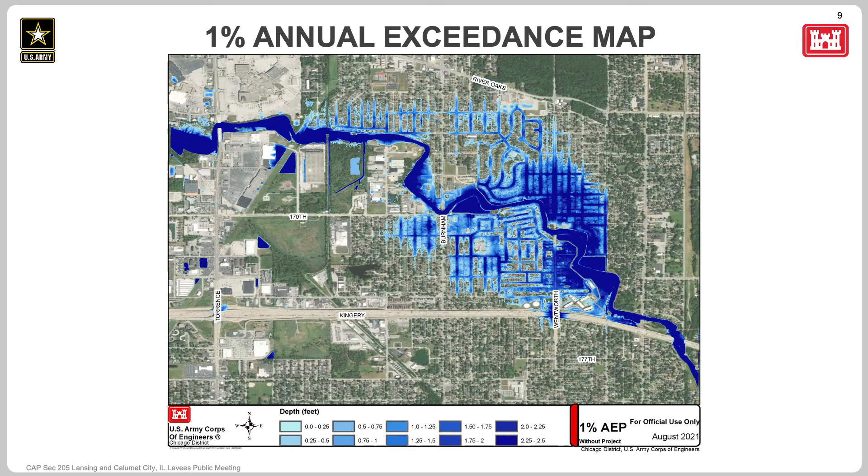To that end, the Village of Lansing and Calumet City really recognize the flood risk that's associated here with the Little Calumet River, and they contacted the U.S. Army Corps of Engineers to initiate the study that we're here to talk to you all about this evening.

The federal authority for this study is Section 205 of the Flood Control Act of 1948. This authority allows the Corps to work with local non-federal sponsors, such as the City of Calumet City and Village of Lansing, on local flood protection projects. Projects implemented under this authority are formulated for structural and non-structural measures to reduce flood risk in accordance with current policies and procedures which are specifically authorized by Congress for the Corps to complete.

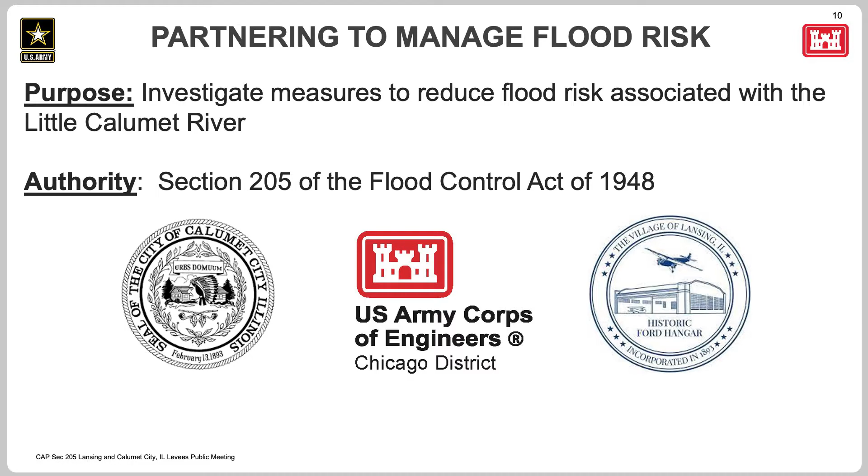Here you can see an overview of the project area. There is a levee system, which I'm sure you all are aware of, on the Calumet City side of the river, and then also on the southern side in Lansing. These two levees function together as a system.

The existing levees on this map are outlined in that lime green, and the existing flood walls, both the concrete and the metal sheet pile walls, are outlined in pink here on this map. The existing pump stations are the red circles. Lansing's system length in its entirety is about 1.25 miles, and Calumet City is longer, with two separate segments, totaling about 2 miles.

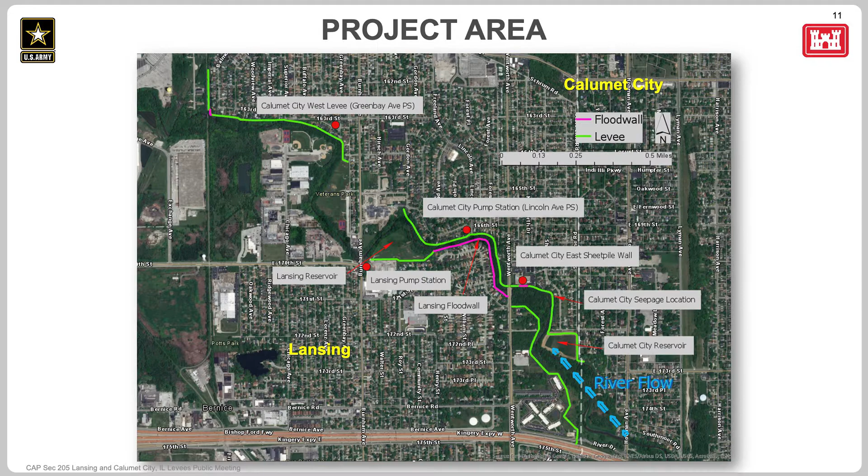Before we get into the details, we wanted just to cover the basics of a levee system, just to make sure we all understand the purpose of the project. On this diagram, you can see the basic features of the levee: the levee crest is the highest point of the levee, and the levee toe is the base of the levee, both called out in the images.

Essentially, the purpose of the levee is to keep the Little Calumet River floodwaters from breaching into the neighborhood and the yards and homes next to the river.

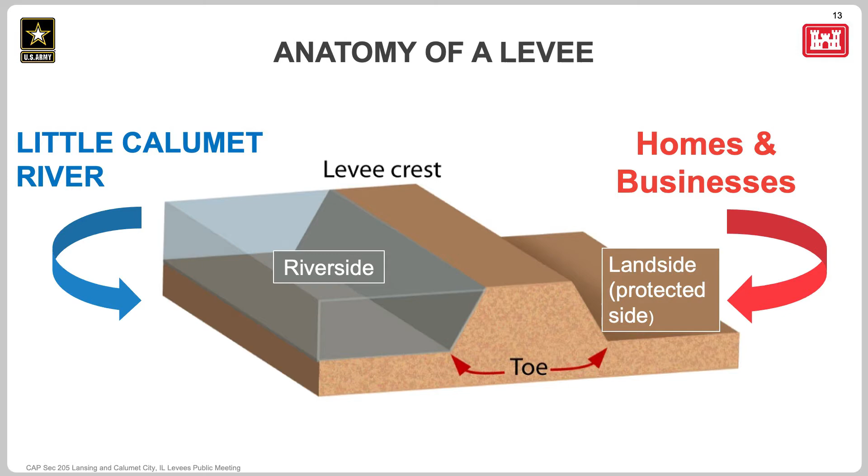As I mentioned, the current levee system is designed to the 1% annual chance event, or the 100-year flood. Here we have some pictures of Corps of Engineers levees from across the country, just to give you an idea of what a levee system looks like.

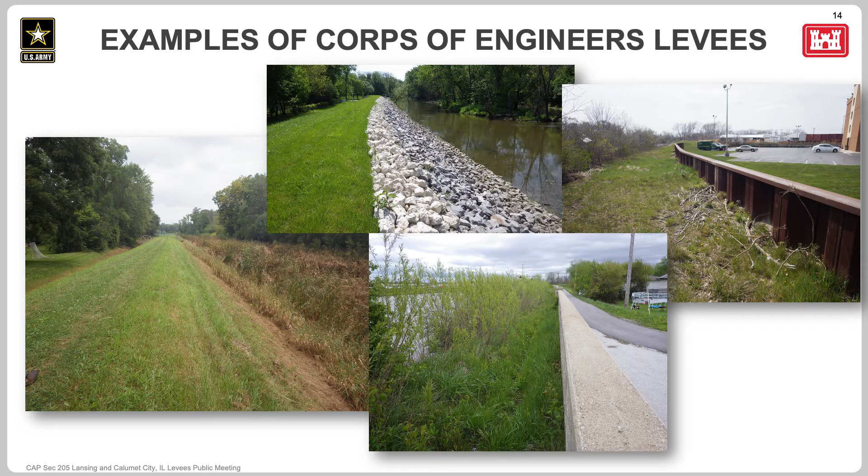You can see it's free of trees or woody vegetation, and it's nicely mowed. This ensures good maintenance, and we can see any deficiencies very easily because we don't have tall grasses or weeds. There aren't any large trees, and I'll cover why that's important in a moment. Where we do have metal sheet pile, that's all intact, not rusted through, and looks like it's in good condition.

The next set of slides will talk about why levees do fail, and we have some pictures as examples. I want to be clear these are not pictures of this current levee system. These are again pictures from our nationwide portfolio, just to give you an idea of the types of failures we may see.

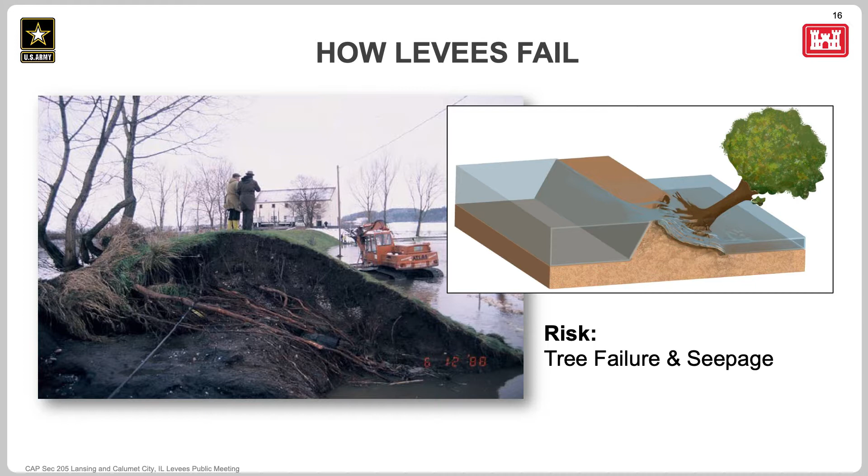The first type of failure is tree failure, which happens because tree roots can grow into the embankment of the levee. If one or more of those trees fall, the root systems could pull out a large amount of the embankment, causing a weak point where floodwaters may more easily breach. The next type of risk we see is slope failure.

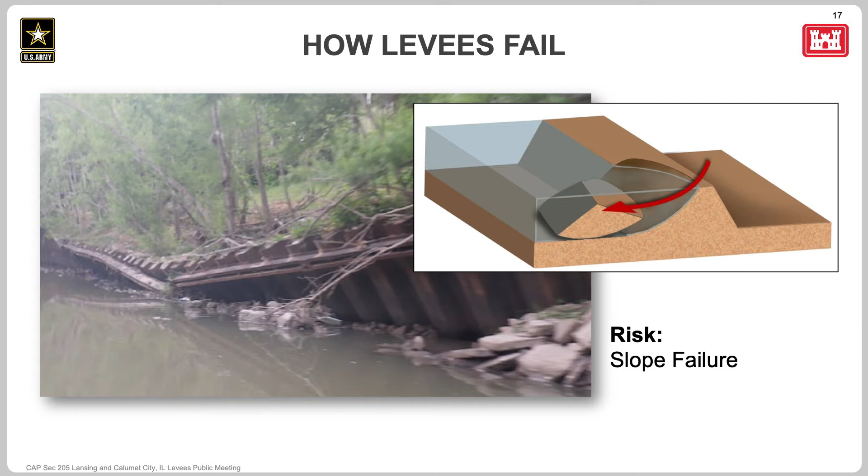This happens when an embankment becomes so eroded that the flood wall or berm just gives way and slumps into the floodway. This is bad because there's less room for flood storage in the river, and it also creates a weakened point where floodwaters could then breach behind the levee.

There's also a seepage failure mode. Seepage happens when small pathways develop inside the berm of the levee and water moves through. As these pathways develop, the levee becomes weakened and can collapse in on itself, again causing a weak point where floodwaters can further breach behind the levee. Seepage can be caused by tree roots.

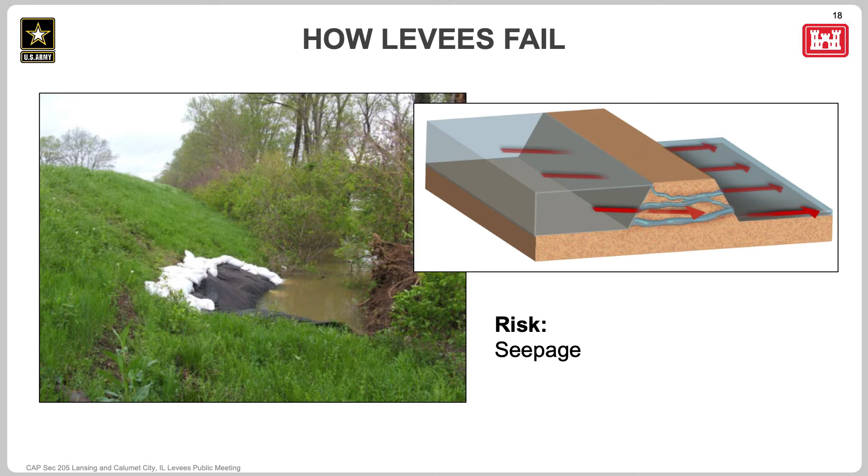It can also be caused by other types of items that have either been embedded in the levee or built into the levee. This is the final type of failure mode: overtopping. Essentially, overtopping failure happens if there is an event that is simply larger than the design of the levee system, and it overtops the levee.

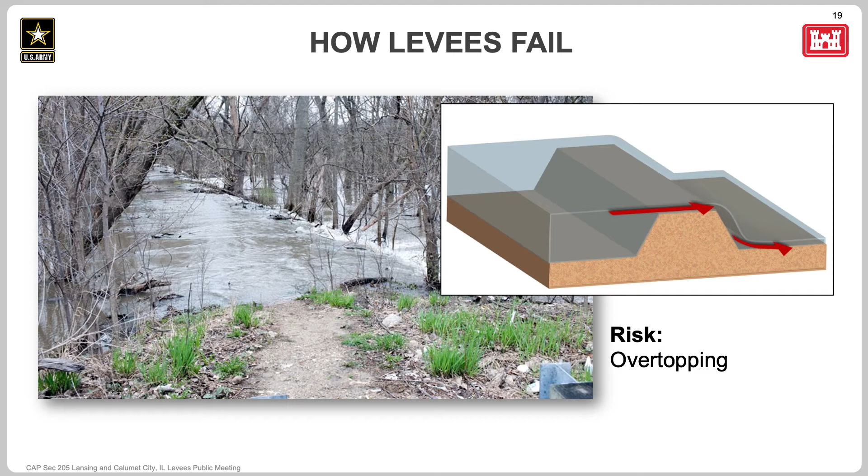In this next part of the presentation, we'll cover the existing condition of the Lansing and Calumet City levees, based upon inspections that the Corps completed in 2018 and again in 2019. Here's a summary of the conditions that we found.

As I mentioned, the levee is designed to the 1% annual chance event. However, the levees were constructed in the 1980s, and over time natural settlement has happened, resulting in some low spots in sections of the levee. So there's actually a lower level of protection than the 100-year event.

Additionally, we noted some of the potential failure modes just covered. We found some seepage in the Calumet City levee. There's also a section of sheet pile wall in Calumet City that is rusted through, so it's not providing the level of protection it was designed to.

Additionally, there's erosion on the riverside banks of the levee, and we see a lot of trees, vegetation, and structural encroachments. So if one of these failure modes were to happen, there could be flooding in an event more frequent than that 1% annual event.

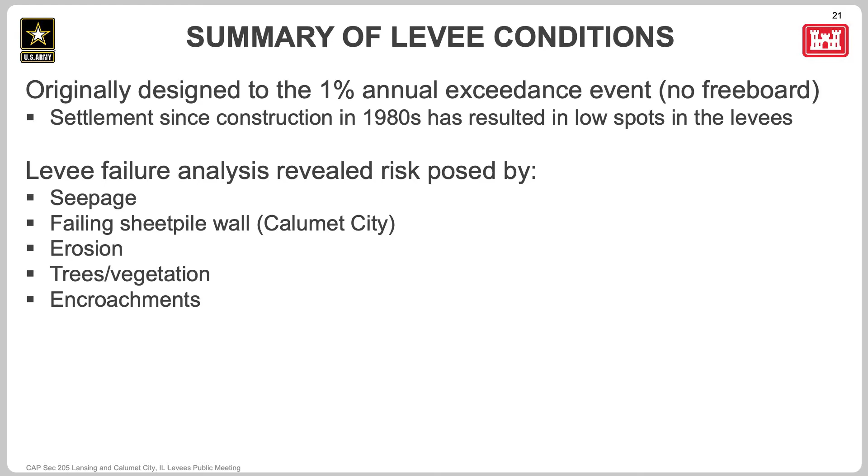These pictures are of the Lansing levee. As I mentioned, there are a lot of trees and woody vegetation growing on the levee. Again, if one of these were to fail, that could pull up a large amount of embankment material, creating that weak point. Additionally, we see some sections of the bank that have eroded, which could lead to slope failure, as I mentioned.

This is not a major contributor to risk; however, we do see it, and this is something that could be addressed through this project. There are many structures located either next to the levee toe or flood wall, or within a 15-foot buffer zone from that levee toe. We call these structures encroachments.

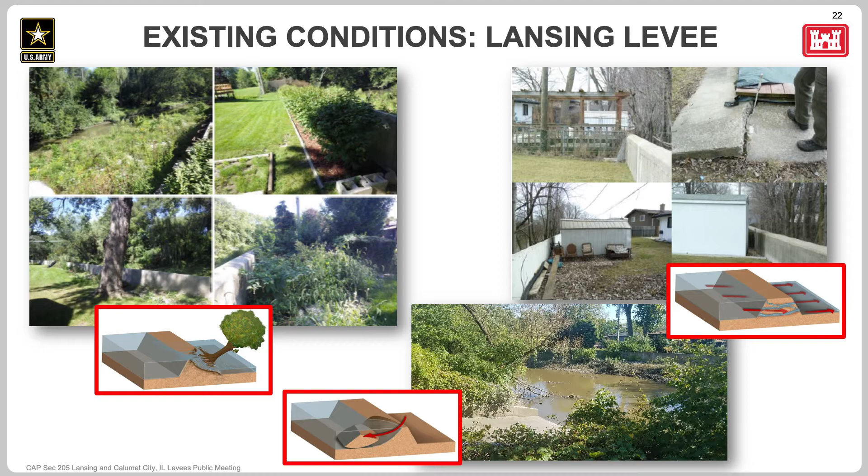As I mentioned, the structural encroachments could create small pathways underground that allow water to move through and cause seepage. For encroachments in the 15-foot levee zone, they can impede maintenance and access by the village or city to make necessary repairs. So for Corps projects, we require a 15-foot clear zone to allow for operation and maintenance of the levees. We have some pictures here covering the existing condition of the Calumet City levee.

We see a lot of the same issues that we see in Lansing—they're very similar. However, there are some additional low spots in Calumet City. With existing conditions, the level of protection is below the 100-year event. For the eastern segment of the levee, we think it could be overtopped anywhere between the 1% and 2% annual chance event. The western segment could overtop anywhere between the 2% annual chance event and the 4% annual chance event.

Like Lansing, there are many structures either in conflict directly with the levee toe or within that 15-foot clear zone, which impedes maintenance and access. You'll see these pictures called out with yellow text—railroad ties and sandbags. There are railroad ties and sandbags built into the levee, and this basically creates a pathway for water to move through and create that seepage failure.

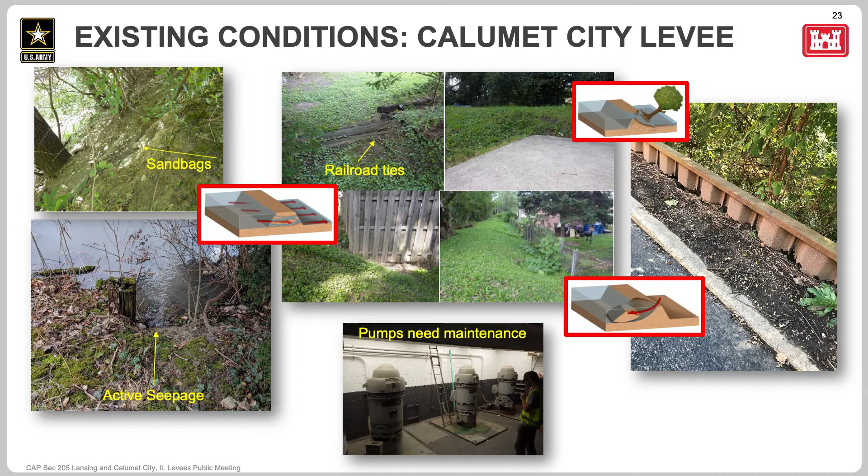Additionally, as I mentioned, there's a picture of that rusted-through sheet pile wall. Right now it's completely rusted through, so if there were a flood that caused flood waters to rise to that level, it really wouldn't be providing any level of flood protection currently. Additionally, there are some mechanical parts of the pump stations that could use maintenance or replacement in kind.

In this next part of the presentation, we'll cover the options the Corps of Engineers looked at in this feasibility study to reduce flood risk along the Little Calumet River. We formulated plans with the goal of reducing economic damages and risk to life safety—specifically reducing those associated with overbank flooding from the Little Calumet River. Another objective was to not only reduce that risk, but also improve community awareness and the local village and city's ability to respond to flood emergencies, helping to allow for mitigation as well.

We do have a few legal and policy constraints and considerations we had to take into account for this study, listed there on the slide. As I mentioned, we're really limited by this study authority to looking at overbank flooding of the Little Calumet River, so we're not looking at ways to address other types of flooding. We also sought to avoid increasing flood stages in other areas of the river—we don't want to induce flooding elsewhere, and we don't want to increase flood stages, because that would impact the ability for the project to be permitted. So we formulated our plans with that in mind.

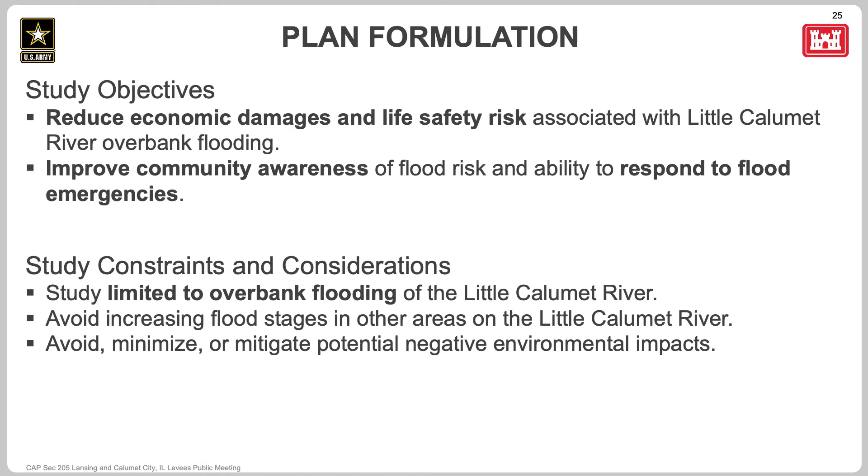Finally, we looked at options that would avoid, minimize, or mitigate any potential negative environmental impacts. So we looked at things like threatened and endangered species and any impacts to wetland areas, and how we could avoid those.

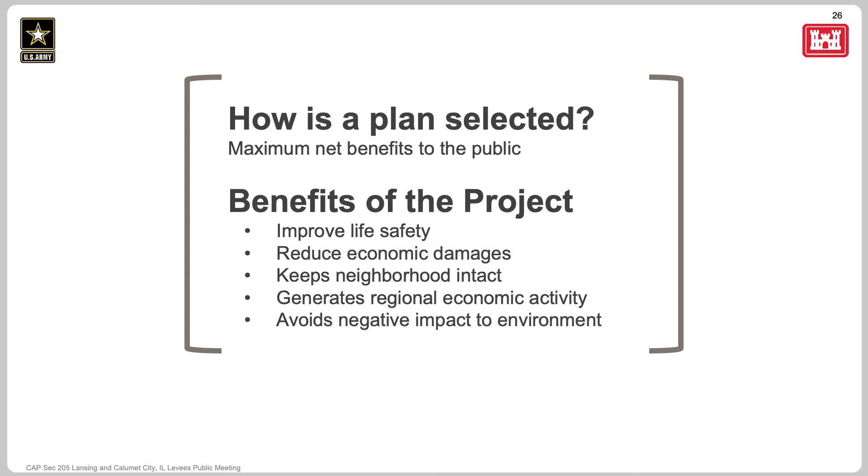Here we have the three types of plans that were considered. The first is the no action plan—this is essentially our baseline condition, the existing condition of the levee. We assume for the no action plan no change in conditions to the project, no additional repairs are made in the future. We use this plan to compare all of our other alternatives against, to understand how and if we're making an impact and how much benefit can be provided by the project.

And then the second type of plan that we consider is called non-structural. Army Corps of Engineers policy requires that we look at non-structural plans during the feasibility study. So essentially what a non-structural measure or plan consists of is measures that reduce the consequences of flooding, not the probability. So things like relocating structures or flood-proofing structures.

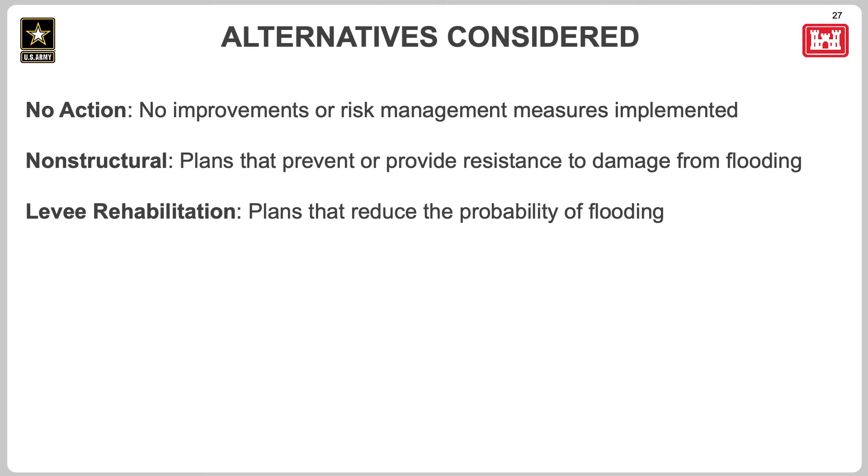And then the third type of plan is a structural plan. So in this case, we looked at levee rehabilitation measures. This is a plan that would actually reduce the probability of flooding, not just target the consequences. Some of the structural measures we looked at included modifying or keeping the existing alignment, and different elevations to which we could repair the levee. Those essentially were the different types of structural alternatives.

So we took all of those factors into account, and in comparing all of the different options against each other, the plan that we are recommending during this draft feasibility study is a levee rehabilitation with a modified section of flood wall. In your handout, you'll see an overview of what the project would look like. So the system would keep its current alignment.

However, there is a section of the existing Calumet City levee that we would swap in a short section of flood wall, and you'll see that called out in the diagram.

Other elements of this plan include restoring the system to the original design elevation, which is the 1% annual chance event or the 100-year flood. So we'd basically be fixing any low spots and making sure that the levee is a consistent elevation throughout the system.

Another large component of the plan is clearing any unwanted woody vegetation with stems greater than half an inch, and this would be to ensure that we are reducing risk from the tree failure mode.

Additionally, we would be going through and repairing any of the eroded embankments or seepage areas, looking at repairing any of the existing gate and drainage systems that need to be repaired, and then also putting in new flood wall where there's currently failing flood wall. Especially important is that section of Calumet City where the flood wall is completely rusted through.

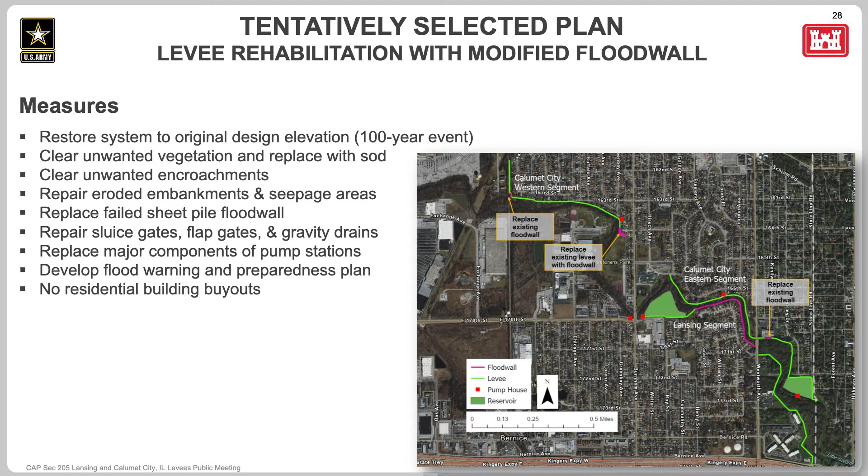So in this plan, we do not have any full residential buyouts. We avoid those by swapping in this new section of flood wall in Calumet City on that western segment. However, this plan would require the 15-foot maintenance easement along the entire length of the levee. We'll talk more about that requirement in a few moments.

So should this project be built, here's a summary of the issues that would be addressed. As I mentioned, we'd be getting the system back to that consistent elevation to provide consistent flood protection throughout the two communities. We would be minimizing the risk posed by those three failure modes: the tree failure mode, the slope failure mode, and the seepage failure mode.

With this plan, we avoid any major environmental impacts, so we don't have any issues with threatened or endangered species, and we also do not impact any wetland areas, so we avoid the need for any wetland mitigation.

Should this plan be put into construction and completed, we do not anticipate that flood insurance rates would be impacted, simply because we're only able to repair to the 100-year elevation without freeboard. There is a chance that with this project there could be some credits for the community rating system rating, but this would be something that would have to be coordinated between the village, the city, and FEMA.

And as I mentioned, no home buyouts are required, and the city and village would be required to obtain the 15-foot levee easement for access for operations and maintenance. Lillian will cover more information about the easement in just a moment.

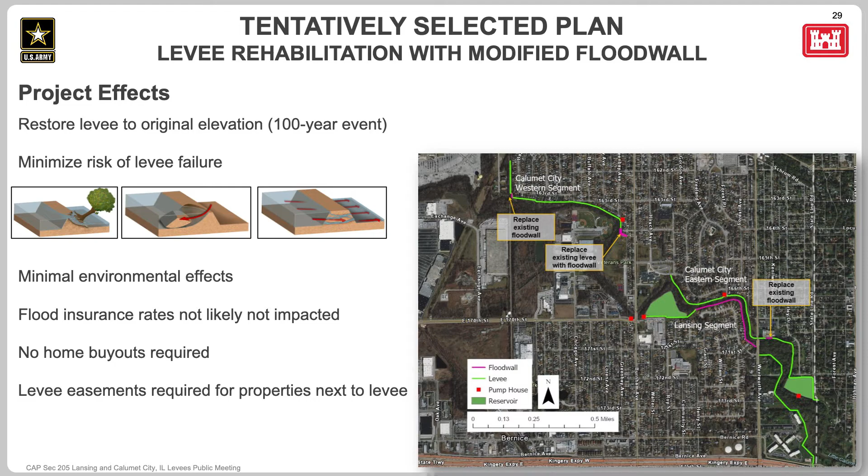So just before we wrap up this part of the presentation, we do want to touch on residual risk. This is the risk that would remain even after the project is completed if we move forward with a project. As I mentioned, we would be recommending repair to the 1% annual chance event, so there's always the possibility that a storm larger than that could happen, and there's always going to be some level of overtopping risk that will exist.

However, upon completion of this project successfully, both levees would be entered into what we call the Public Law 84-99 program. It doesn't have a very fancy name, but it's very valuable because it allows the Army Corps to provide flood risk preparedness, response, and rehabilitation to the village of Lansing and city of Calumet City moving forward. So if there were a very large storm, the communities would be able to tap into this program and work with us for flood fighting assistance and any repairs or rehabilitation needed if the levee is damaged in the future.

Another way we're looking to further mitigate and reduce risk is through flood warning and preparedness plans, making sure there's a good plan in place and good risk communication with residents. Also, the village of Lansing and city of Calumet City would be required to complete certain operations and maintenance activities as a condition of the project partnership agreement. There would be maintenance moving forward if the project is constructed. That concludes my section, and I'm going to pass it off to Lillian to cover real estate requirements.

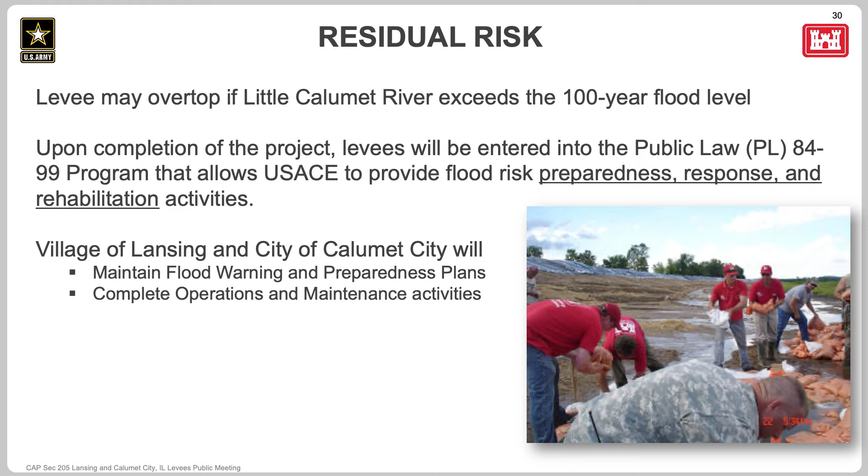Good evening. I'm Lillian Harris, the realty specialist for this project, and I'll be speaking with you this evening about the real estate requirements for this project.

As you've heard already, the area surrounding the levee must remain clear of structures and woody vegetation. As we saw in Caitlin's presentation, woody vegetation can result in levee failure. For proper maintenance and operation of the levee, as well as for safety, the area within 15 feet of the levee must remain clear at all times.

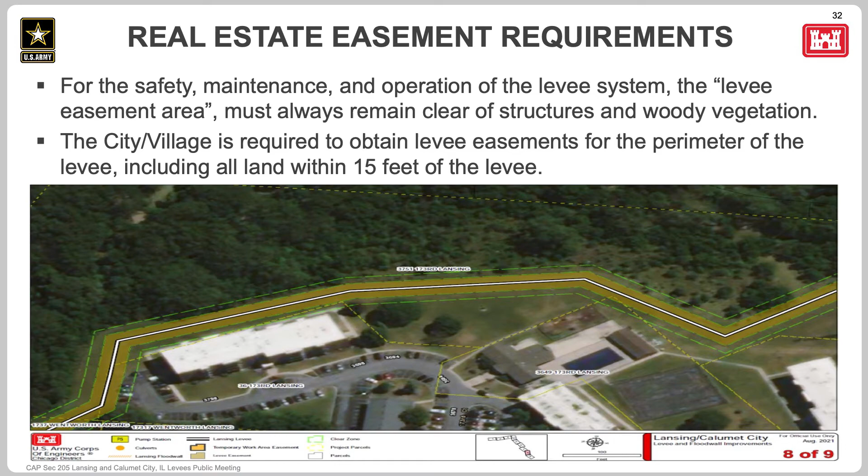The city of Calumet City and the village of Lansing will be required to obtain levee easements for the perimeter of the levee, including all land within 15 feet of it. I wanted to take a moment to explain a levee easement. A levee easement grants the city of Calumet City and/or the village of Lansing the rights to use the property within that easement for purposes including levee construction, operation, maintenance, and repair.

At this point, the project is still in the feasibility phase and has not yet been approved. With easements, the property owner retains ownership rights and privileges, but must not interfere with the rights granted by the levee easement. You might be familiar with other easements on your property, like utility easements for water, gas, or electricity. This would be similar, with the difference being it allows the city and the village right to access the property for maintenance, operation, construction, and repair of the levee.

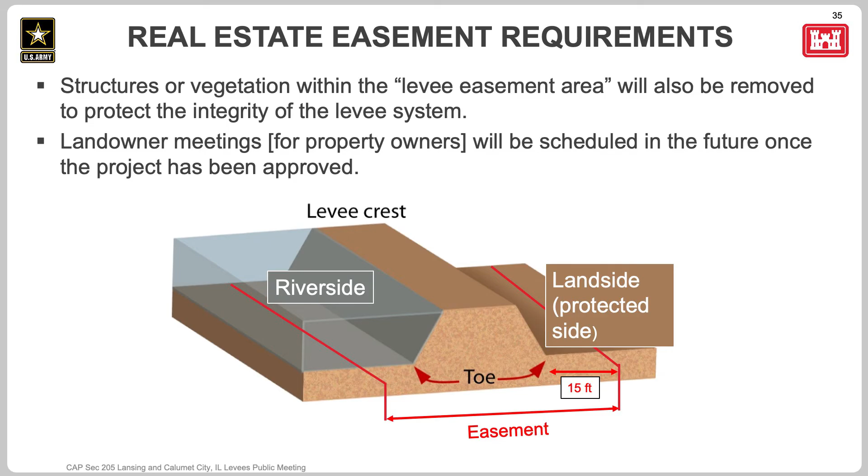My name is Imad Samara. I'm a project manager for U.S. Army Corps, and this project is kind of special for me because for many years I spent building the project just east of here in Indiana. So I was always hoping that one day we could cross to Illinois and also repair those levees in Lansing, and I'm getting the chance to do that.

As Lillian mentioned, and I believe Caitlin also said, we are in a feasibility phase. So we have additional steps to go through before we're actually able to build something and get it done.

Right now we are in the public review phase, which ends on September 20th. At the same time, other reviews are being done. Once we get all the comments and address them, we go from a draft report to a final report, and we will work to approve the final report sometime by November 2021.